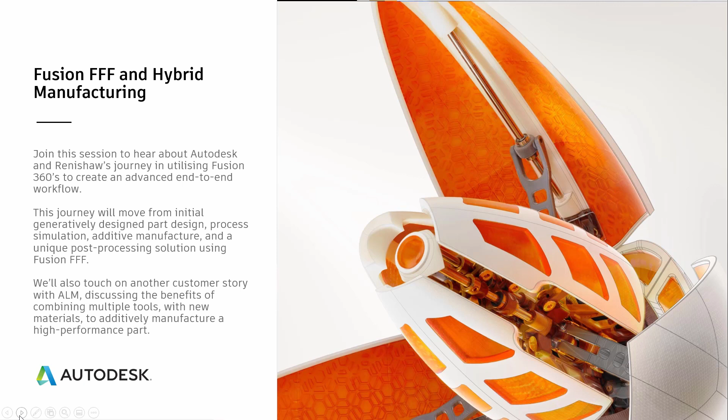We'll also touch on another customer story with ALM, discussing the benefits of combining multiple tools with new materials to additively manufacture a high-performance part.

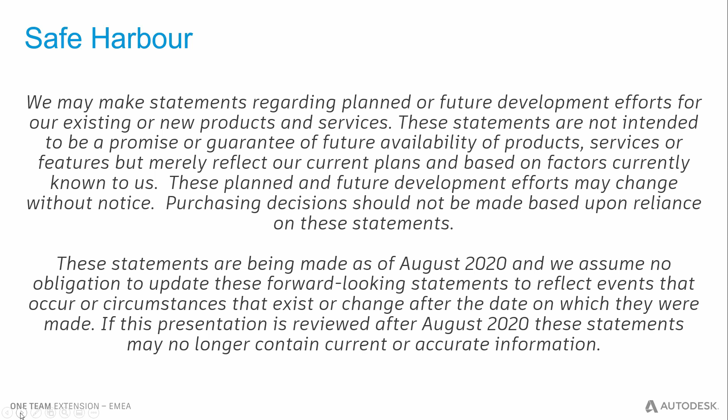But the ones we want to look at, these are quite small and they're measured in terms of inches in diameter, and these are used in pilot and research plants to focus on the next generation of reaction and fermentation technology. And by focusing on these small parts first, companies can get the edge before moving to large scale. Now, of course, small scale parts provide very different challenges to large scale, especially manufacture. So this was the opportunity for NOV and Autodesk and Renishaw to work together to develop this part.

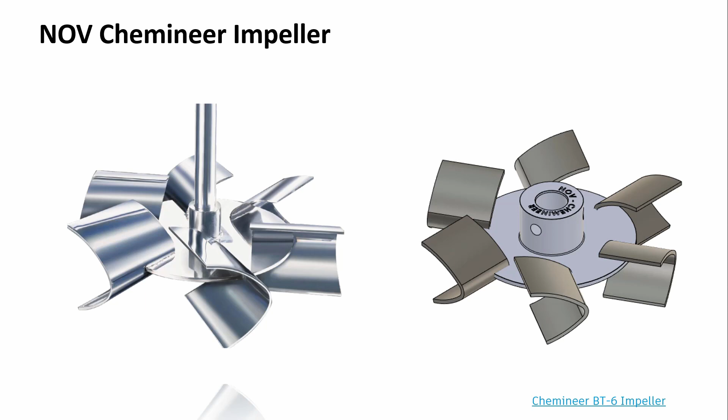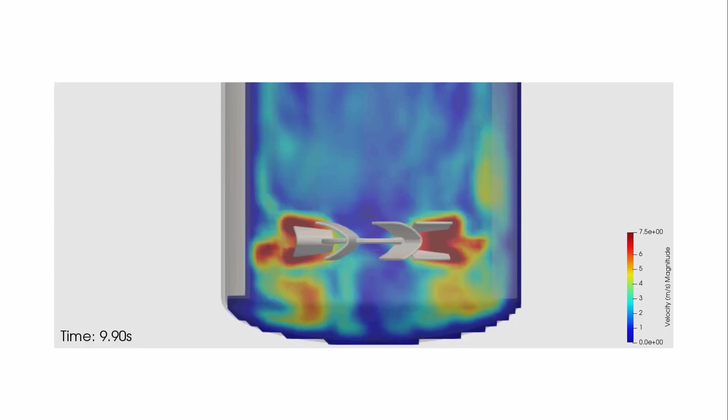So we began looking at the original CFD to see how the part performs. So we were looking at this and thinking, okay, how can we improve the part? The blades, of course, these work already, they're proven, so we've not got much design freedom. Looking at the hub and shaft, again, we've got very little design freedom here, and this is difficult to make the difference. But we started looking at the disc, the central disc that held the blades to the hub. And we started asking questions like, is there a need for it to be this way? Is it important? Is it critical? Or can it be changed? So what we did is we removed it and simplified the design down to the blades and the hub.

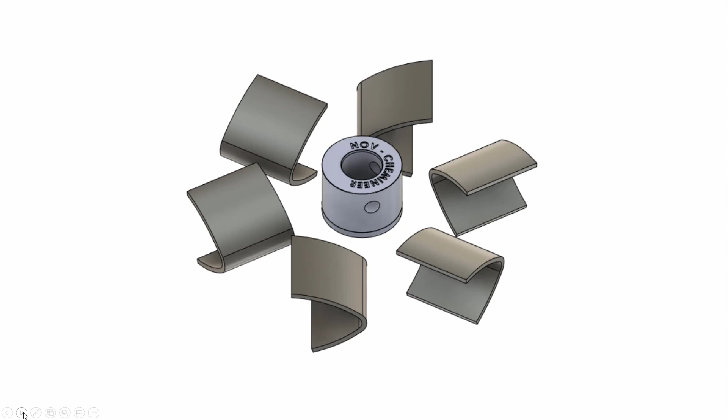And this is where Autodesk felt they can make the difference. This is where we felt we could increase the manufacturability of these small scale impellers to minimize costs. So we thought this was a case that maybe generative design would work well for. So generative design is an iterative design process that gives you numerous outputs for a given set number of constraints. The great thing about it, it gives you hundreds of solutions that maybe a team of people could not have conceived. And this is all within Fusion. So we created a setup, we ran studies, and what we did was we decided to look at 1/6 and focus on the connection of an individual blade to the hub.

We created preserve and obstacle geometry, and we set up load cases. And of course, we looked at different materials that we could use. So with regards to the manufacture of this part, this is where we started considering additive. Additive, of course, is great for low volume and outside the normal kind of operations of manufacture. And this part fell into that category.

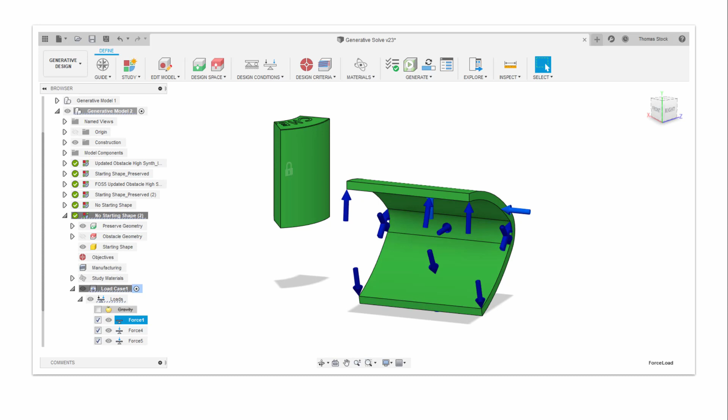And with the objectives, we really focus on minimizing mass and therefore cost, as well as increasing manufacturability, because this is what NOV wanted. And of course, this would mean if we were to do this, then we'd be successful in what we wanted.

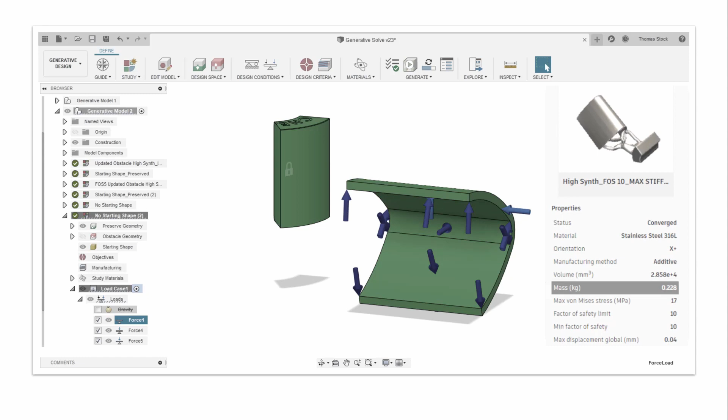And so here we go, we ran some generative studies, and you can see from the studies there was quite a few outcomes, and this is just kind of video showing you some of the ones that we look at. Obviously we wanted to find ones that lowered the mass, but of course we wanted to find ones that were still manufacturable, and this is where we went to Renishaw for their expertise.

So this is the first kind of design that we gravitated towards. We were looking at this and thinking, okay, manufacturability. How manufacturable is this for an additive process? And this is where we went to Renishaw. And then we started asking the bigger questions like, well, how would we orient it? How would we support it? What is non-negotiable? What happens after the build?

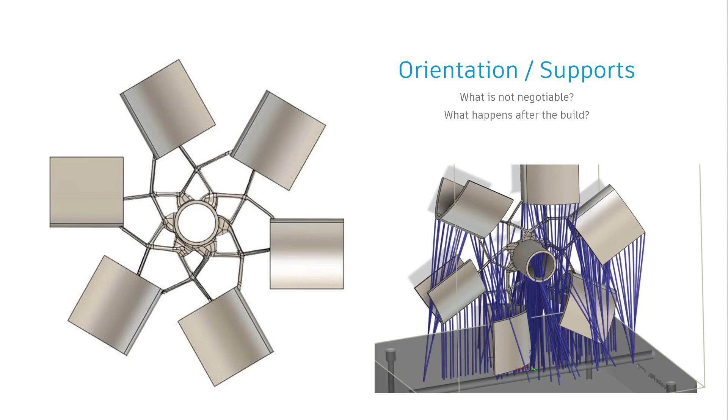So it's interesting, if you look at the bottom picture on the right, you could see that maybe this is not a suitable orientation. This is not a suitable part, so we need to find an optimal orientation, so we'd have confidence in the support structures. Because overall we wanted a successful build. And I mean successful in terms of getting a part at the end that has the desired quality that we'd want. So we went back to Renishaw and tried to draw on their vast experience with builds, orientations and support.

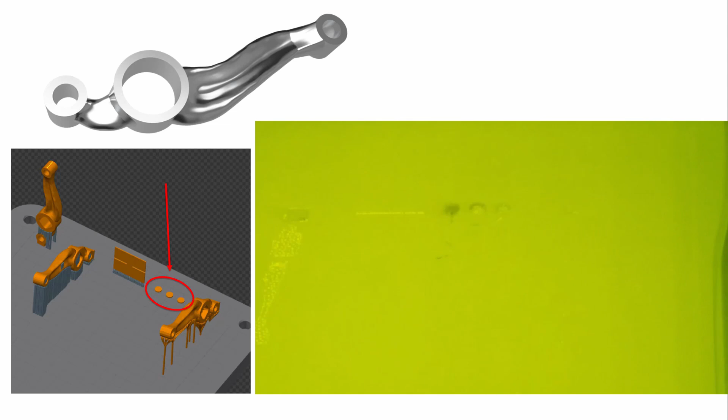And this part here, this is a bracket and some small discs. These are some issues that they faced in the past with builds like this. You can see that actually during the build the discs become loose and get pushed around by the recoater. Of course these ended up failing, and not only would it lead to a failed build but also possible damage to the recoater.

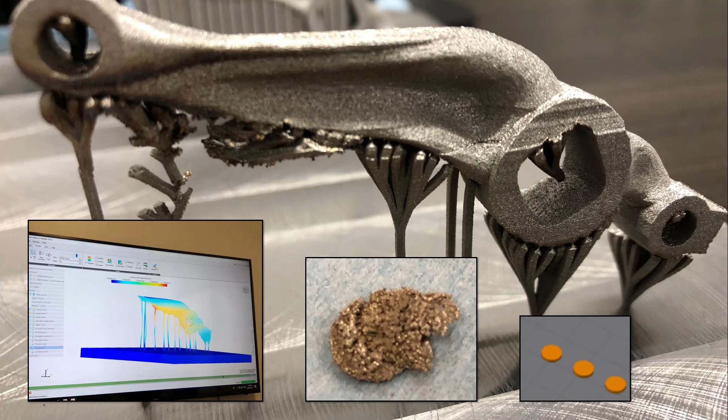And with the bracket itself, well, it actually didn't turn out much better. It failed as well. And if you actually look at it, you think, oh, maybe why did it fail? We had supports, we designed it for additive manufacture, but then maybe you look at the process simulation and you actually see these areas of support were always going to fail. You can actually see a picture of the disc at the end of the print. It's just a glob of material. So this leads us to then ask very important questions about our own part, about our own NOV impeller.

So jumping back to our part, the main restrictions we were finding for additive are function and material. And the three problems we were facing with the design of this impeller. The first one was performance. The part had to, of course, meet or surpass the performance requirement dictated by the simulation and the previous design, and meet the requirements placed by NOV.

Two, the availability of materials for additive, especially SLM, is quite limited and it's growing. So we need to find a material that's suitable for this part using this new additive manufacture process. This part didn't want to be too heavy. It's going to be spinning at a high RPM. And also, of course, it's got to be particularly corrosion resistant. It's going to be mixing with oils and various other fluids and be under constant use.

So one of the materials that we started to look at was titanium alloy, Ti6Al4V. So of course this is an expensive alloy, so it really leads us on to think about reducing the overall material usage. And this would lead us on to our third problem and consideration, so printability and support. So we want a successful build. The less support and the better orientation means less titanium used, and it's a faster build and it saves cost.

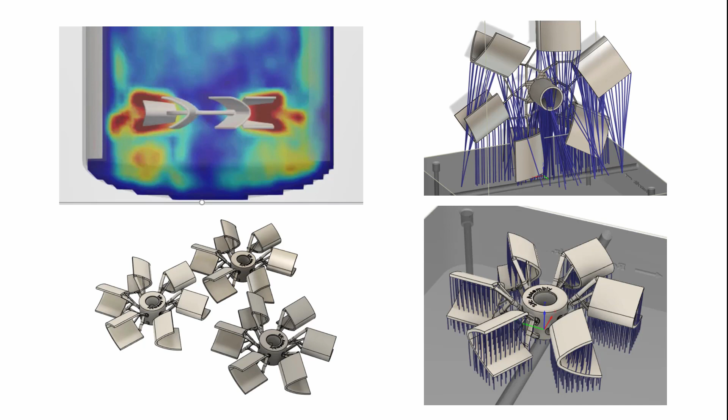And so we could reduce material usage and go back to what NOV wanted, which is improve the manufacturability, reduce costs. And I could talk how we went about this on the next few slides.

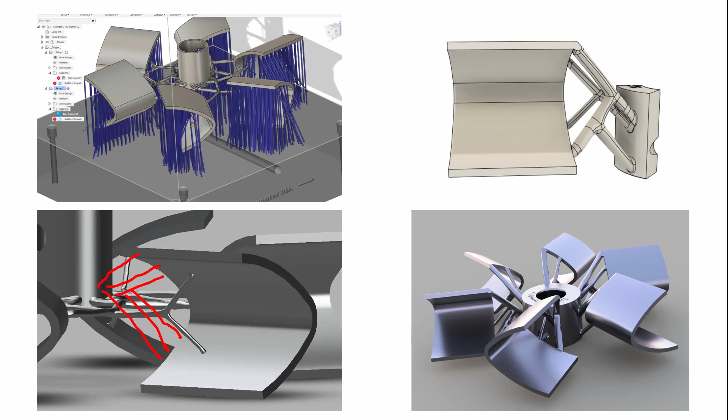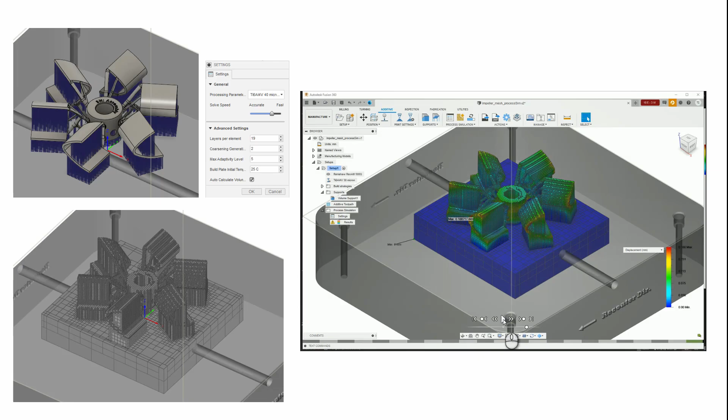So, having looked at the simulation and knowing the build would be okay moving forward, we then create the setup for the build. So we actually wanted to print 4 of these impellers, and we wanted to print it with Renishaw on their RenAM 500Q machine. This is a quad laser machine, and as you can see, this is in Fusion creating the setup, and got this simulation of the tool path, and we're looking at it on a per layer basis. And you zoom in and you can see the hatches and the borders.

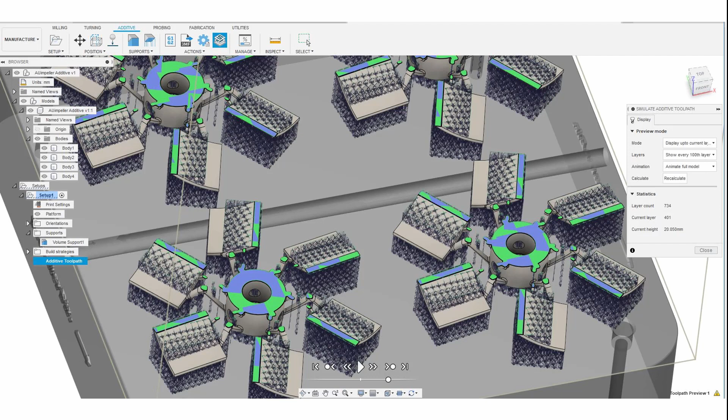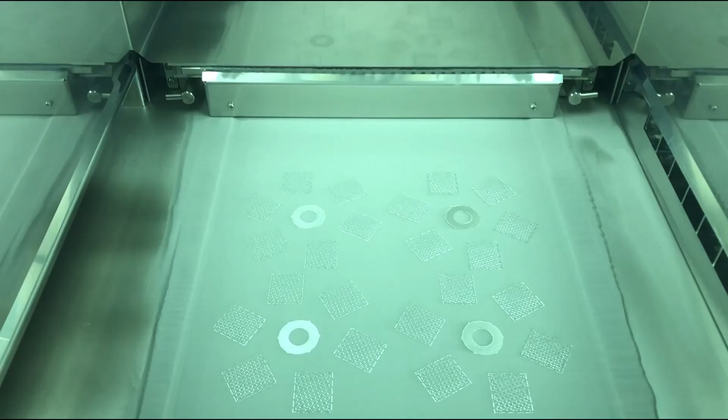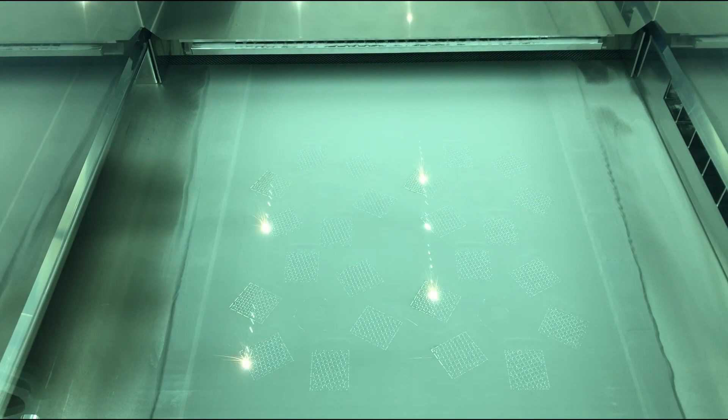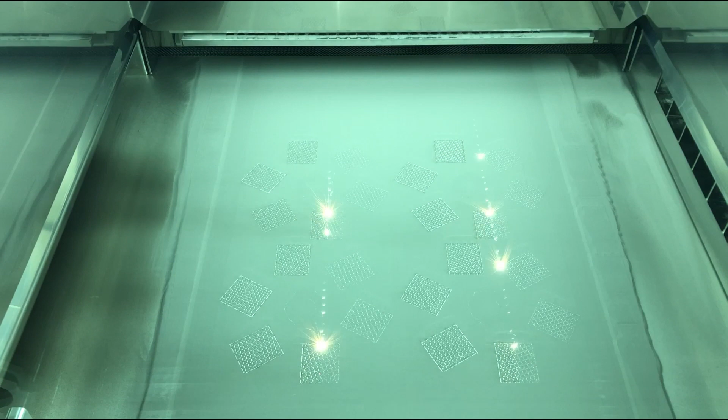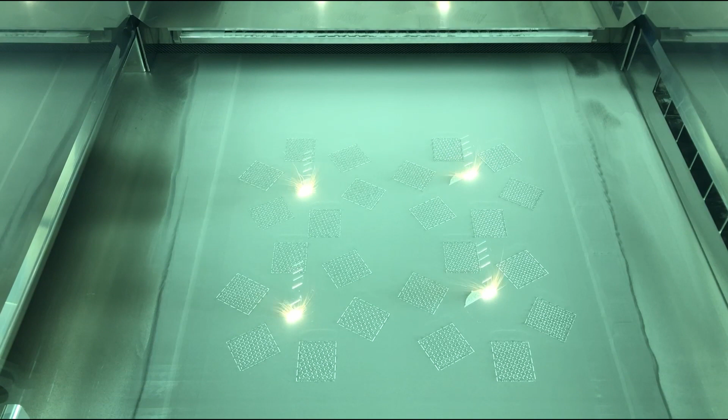See, there we go, the recoater's just laid the powder. And we've got the lasers, as I said, it's quad laser, so we've got 4 lasers. At the moment it's just creating the support structures. And then once it's done with the supports, it'll move on to the central hub, as you'll see. This is the first few layers that's been printing. And of course, if you watch carefully, see it's building the central hub profile.

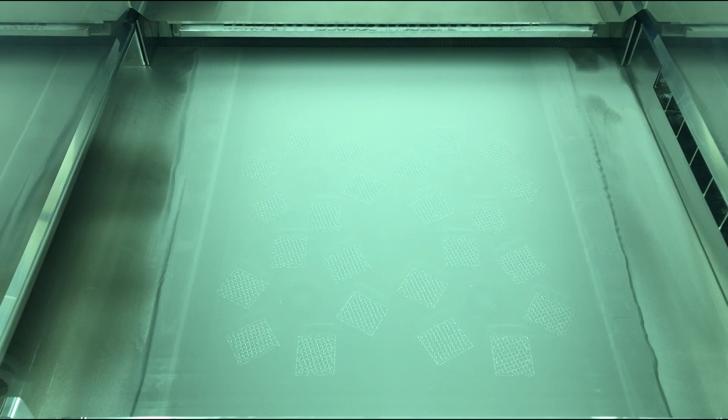So you can see actually that there is a loss of efficiency here. You can see where there's 2 lasers printing, while the other 2 have stopped. So if we look at the 7 wastes, we've got the waiting waste here. So we've got a bit of loss of efficiency. And of course, you could also say we've got the loss of efficiency of the powder spread, where there's a pause in the actual build process itself while the recoater has to lay the powder.

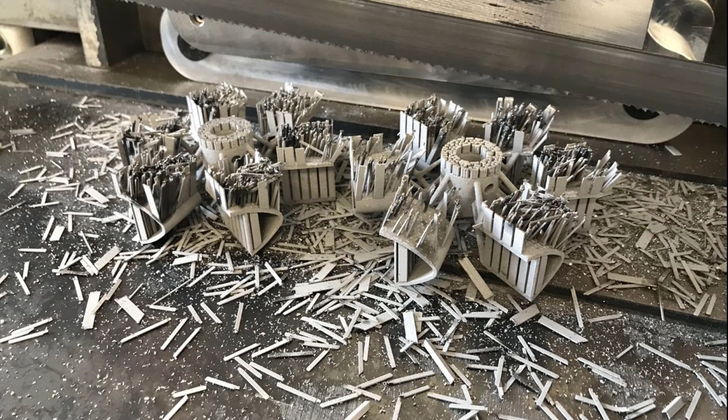There are machines now that automate this process, and it's good to see because it's catching up with the technology itself. But often people are ripping them off or they get machined off. So this was our next step. Having removed most of the support, we also wanted to machine some of it away. So this is now our post-processing stage.

And how we went about holding the impeller was using this machine block that we put in the jaws, and then we bolted the part through the top, as you can see in the left picture, through the central hub. Now, if you watch the video, you can actually see a relatively large deflection of the blade under low load. So you can see just how the dial moves.

So this is obviously quite worrying, and if you watch the video and listen to the sounds, you can just see the tool comes in contact with the blade. Listen to the sound, it doesn't sound good, and then right at the end, you might hear me swearing, so apologies for that, right at the end the tool broke.

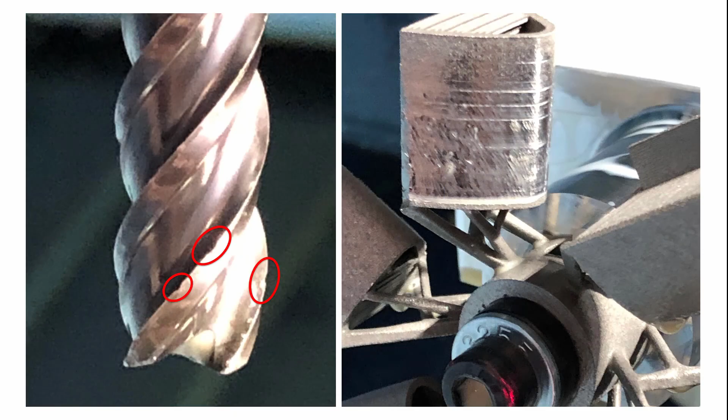So we can actually see with a zoomed in picture the tool's chipped, it's broken, and there's an awful chatter finish on the critical surface of the blades. So looking at this, it's not going to work, and we're running out of time.

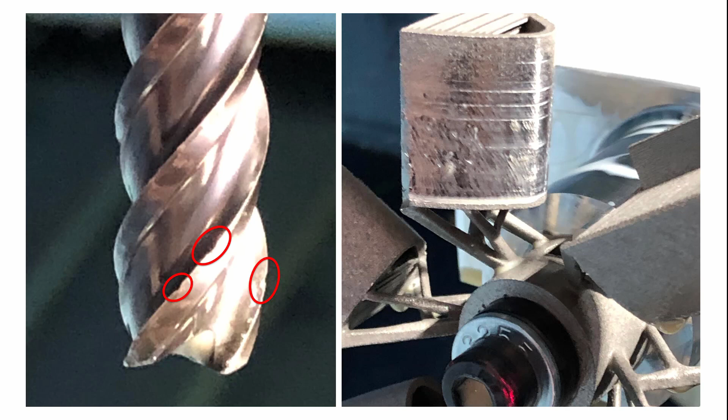I was at Renishaw's Additive Solution Centre in Kitchener. I was only there for a week, and we were trying to go through this whole process in the few days I was there. And we realised quickly that the current setup was not going to work for machining this part. So we had to go back to the drawing board. So we had to get creative as well.

And then when they were taken off and inspecting the part at the end, this is where they've seen that they were so far off. They're so far out of tolerance because the part was actually being bent by the jaws. It was held in a position in the conformal jaws, and as soon as it was taken out to be inspected, it went back to its normal deformed rested position. So everything was out, and we knew this wasn't a solution for us going forward.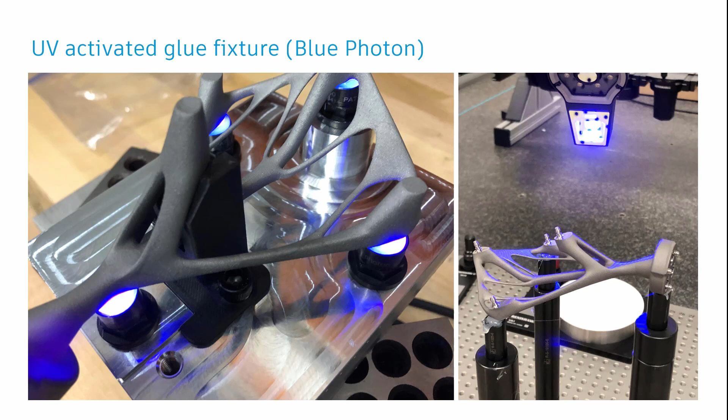Again, drawing on Renishaw's past experience, they brought up this new innovative solution to holding difficult parts. This is the UV activated glue fixture, also known as the blue photon fixture. It's very interesting how it works. It uses this UV curable glue on these inserts, and you literally glue the part down. Awesome. So incorporating this blue photon glue fixture, this was the solution that we came up with.

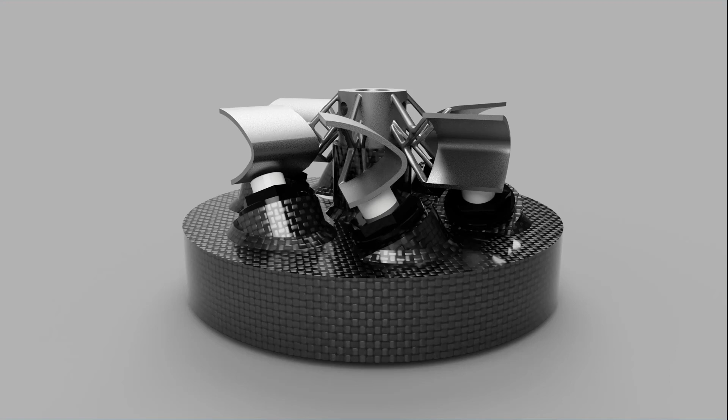You can see each one of these blades are being held. This is a 3D printed fixture. We'd had issues with machining, we needed a fixture to hold the blades properly, and we needed something quick. It was printed overnight out of carbon fibre, and it holds these inserts with the glue on that hold the individual blades. So we had something in the morning to hold our part for machining. I'll give you a breakdown of how it works on the next few slides.

So you can see we've got our impeller and our gripper, and that's offset from our blades by about 1 millimeter. The blades are the critical surface for machining, so this is what we need to hold, because these surfaces drive the mixing of the fluid. So we had our fixture offset by 1 millimeter. We've then got our insert, and it holds the gripper in place and makes sure everything's aligned.

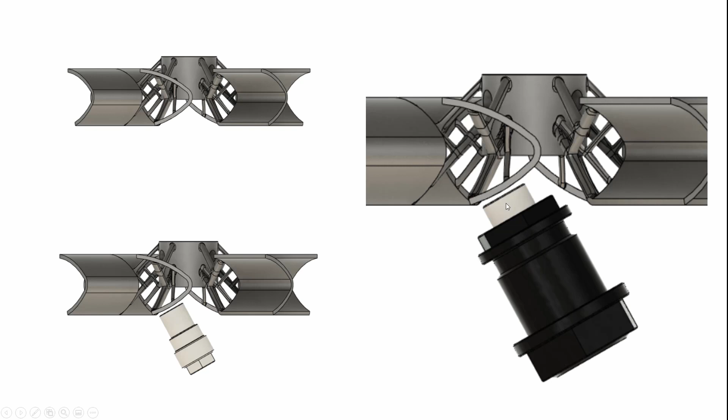But now we need a fixture to hold these in place to the blades. And this is where our 3D printed fixture came in, and this is how it held them. You can see a sectional analysis all within Fusion.

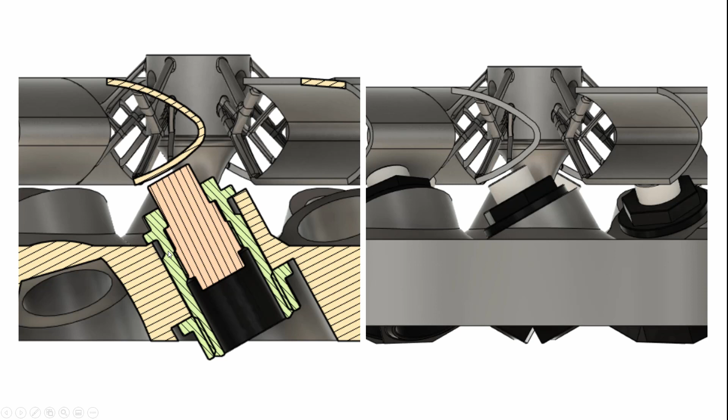You can see how the gripper's offset by 1 mil, as I said, and you've got these very slight flanges either side of the insert, and it's not a large contact surface to play with, but it was enough to hold the part really securely.

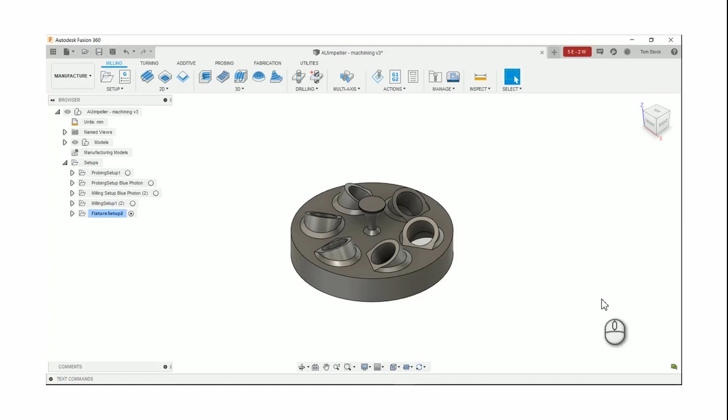And here we go. So this was the part actually having been designed, and this is how we set it up for manufacture within Fusion. So obviously, as I said, we'd had an issue with the original fixture, so we went back into Fusion to create this new part to hold these blue photon UV curing inserts to hold our blades for machining.

And I can play the video, and this is us having designed the part, creating the setup, and printing it directly from Fusion to a printer. The printer that we used was actually the Ultimaker S5, but I'll show you that in the next slide or so.

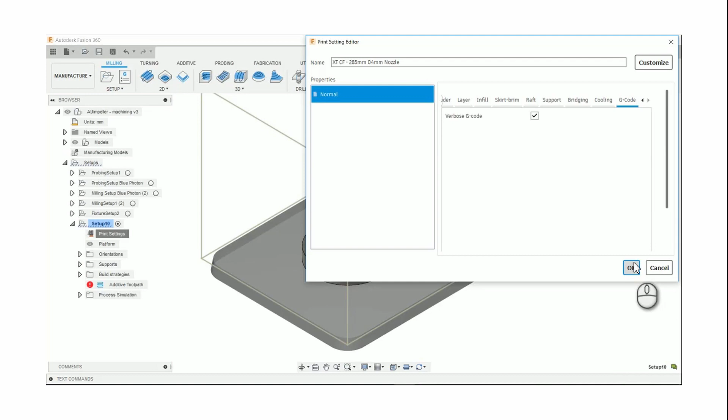And what was great about this is we could just stay under the one Fusion roof. There's no back and forth, no data exchange. We stay within Fusion. We had the impeller already there. We just loaded in the CAD data of the inserts, designed around them, designed around the impeller, and then we could just simply click print and generate this part and send it to the printer, and then we had a fixture to use overnight. You can see it just post-processing, very quick.

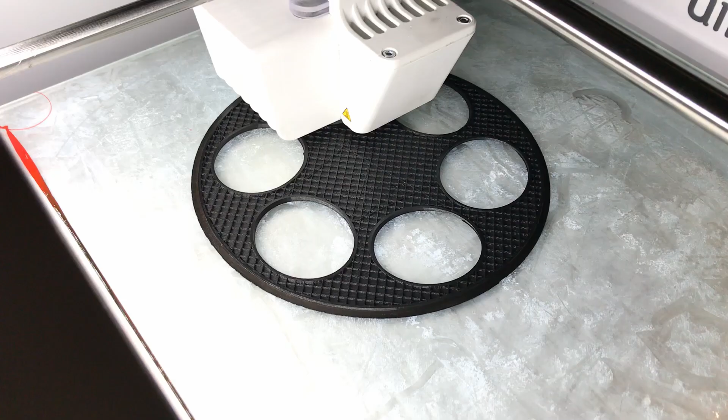So here we go. This is the fixture having been sent to the FFF printer. This is the Ultimaker S5 that we used, and the material that we used to print with is this ColorFabb Carbon Fiber XT filament. It's quite different to normal 3D printing filament in that it's 20% carbon fiber, so it's a lot stronger and stiffer, and this is of course key for machining.

Is it as high performance as maybe a metal fixture? No, but it meets the requirements for our low machining forces. See, it's just the print head doing the infill now, building up in layers. And hopefully all it needs to do is just hold the blades firmly and stiffly so there's no chatter. And of course a better hold would lead to a better surface finish and a better overall quality. And interestingly, this material had 84% of the tensile strength of aluminium, so it's very stiff.

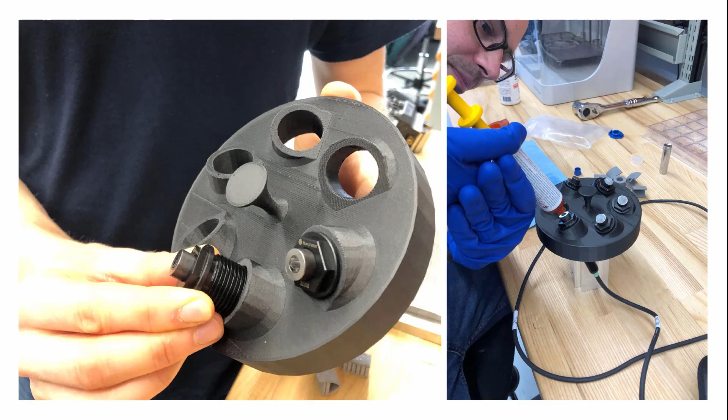Fantastic. So for those who are interested, this is the printed fixture, and you can see me just fitting in the inserts, and they fit really, really well. And then we've got the central pillar as well, so that's just to place the central hub of the impeller on and gives us a reference for aligning the part with the grippers.

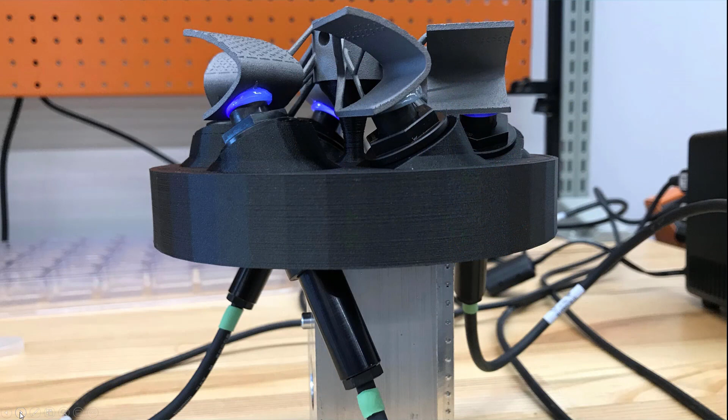And on the right, that's Carl from Renishaw just applying the glue, the photosensitive glue, ready for curing. You can see this is the glue applied, and we've got our UV light source, and all it needs is 90 seconds of curing to get a full set, and we do 3 at a time.

Perfect, and there we go. That's the impeller fully held by our fixture and the blue photon inserts. And now once the glue's set, the light sources were removed, and now we can just put in a chuck and we're ready for probing and machining.

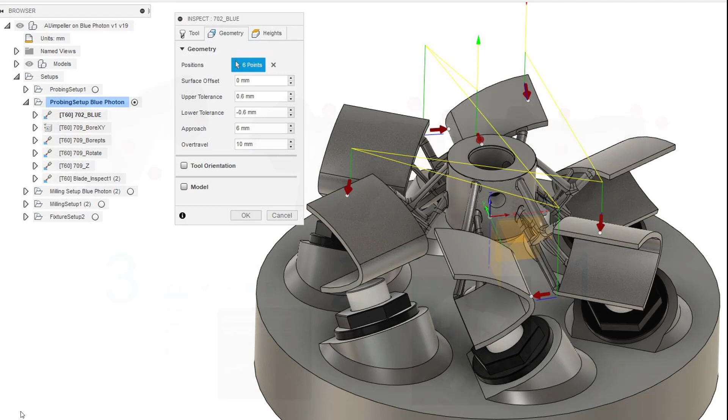So we jump back into Fusion and we create our probing setup. We set up our points, and you can see a nice simulation of the probing path within Fusion. So this is the 3-2-1, and of course this is also known as plane line point alignment. And you can see how it's been set up here. So this is what we use to do the initial alignment of the part.

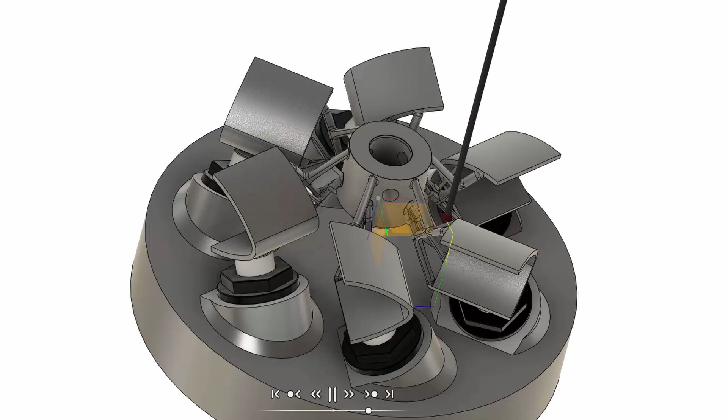This is it in action, and it does the plane line point. So it's just the plane, and now it's going to do the line, and then that final point.

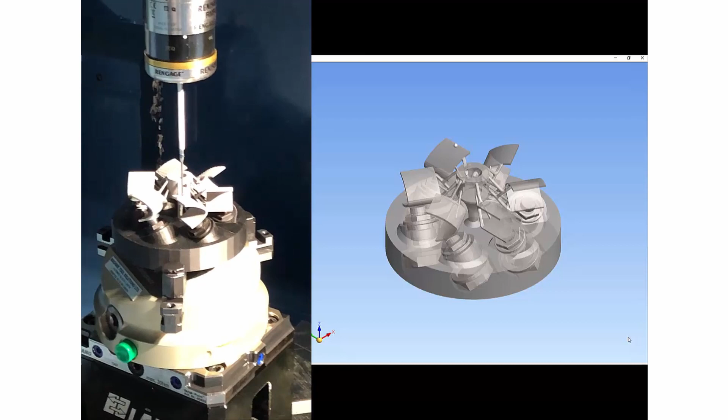And of course, this is where a bit of the magic happens. So we've got this product called MSP NC Perfect Part, and this is a post-processor that we use within Fusion that basically does the magic of aligning the part. NC Perfect Part wasn't available commercially at the time, but it's just used by us for this project.

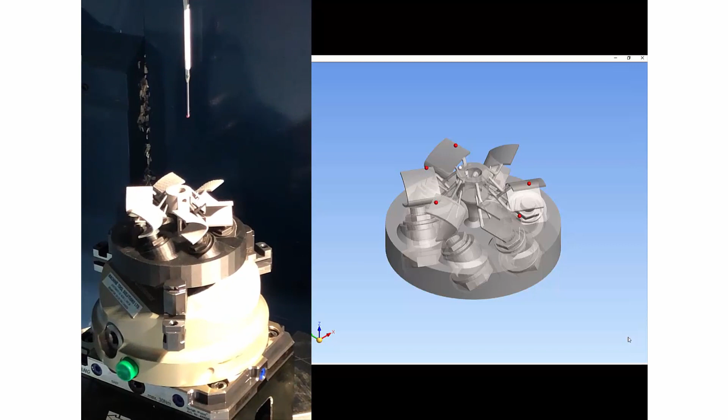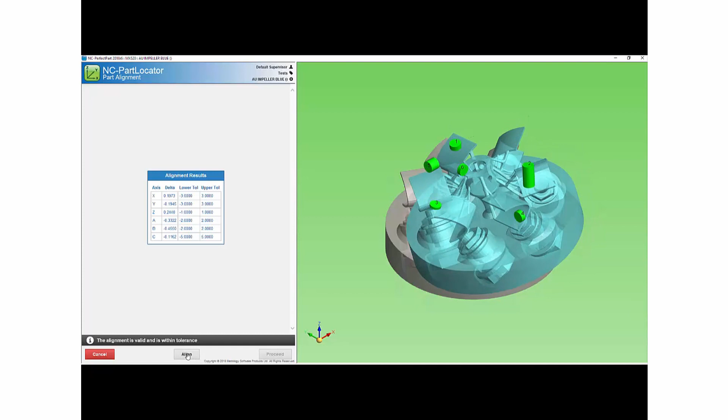And you can see it doing the 3-2-1, the plane line point alignment, and you can see the points being plotted on the part on the right. And if you go into MSP, you can see the full report with the deviation of the points, and you can see how it needs to do the alignment to fit the part. You can just see that again, that unalign and alignment. Fantastic, and then we can proceed when we're happy.

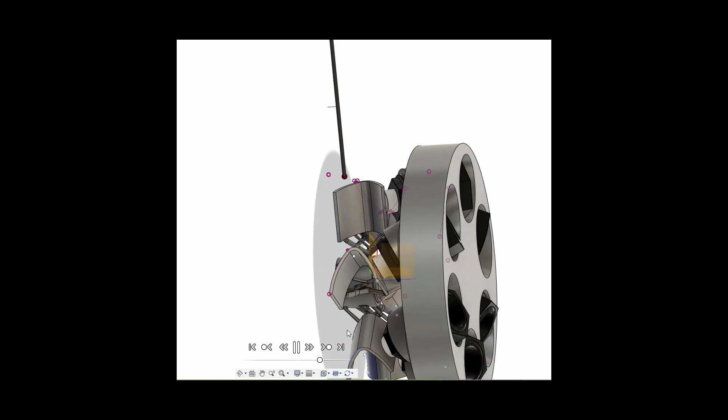Now of course we can't align everything with a 3-2-1, so further alignment is needed. So that's where we go into the final alignment with the blade. So again you can see it running through the probing, the simulation of the blade. You can see on the left then the real life probing of the blade. Points being recognised in MSP NC Perfect Part.

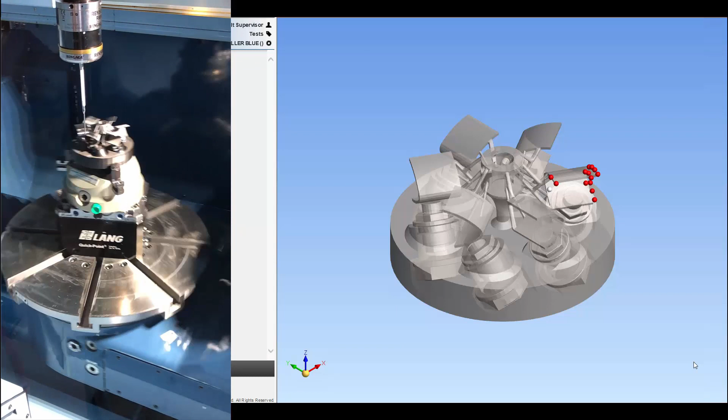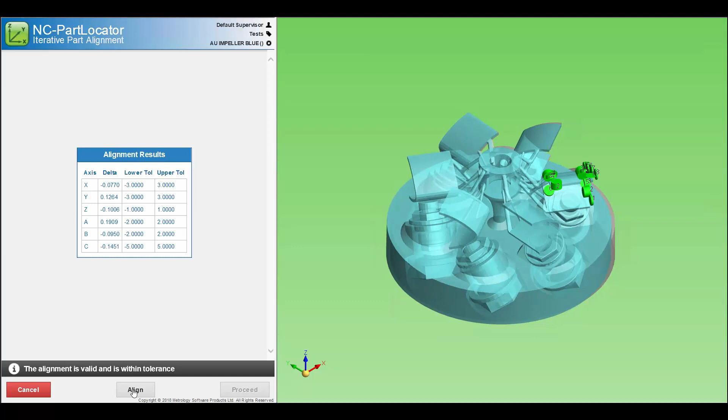So we can see our alignment results. Again, we've got this full report. We can see kind of the deviation per each point. And clicking proceed does the final full alignment of the part. And then you can see the results. And again, one final report just showing you with the new alignment, with the new coordinate values.

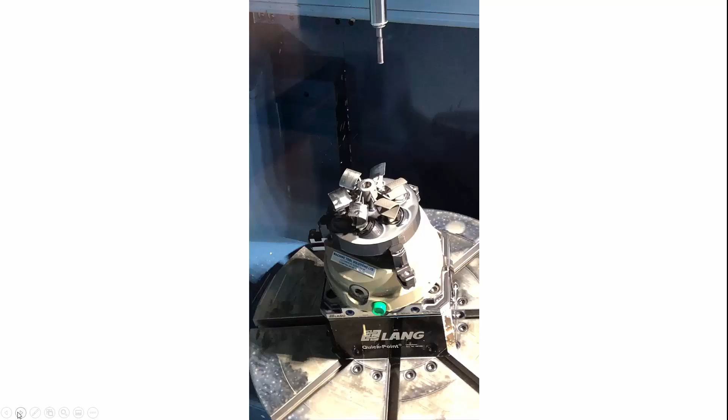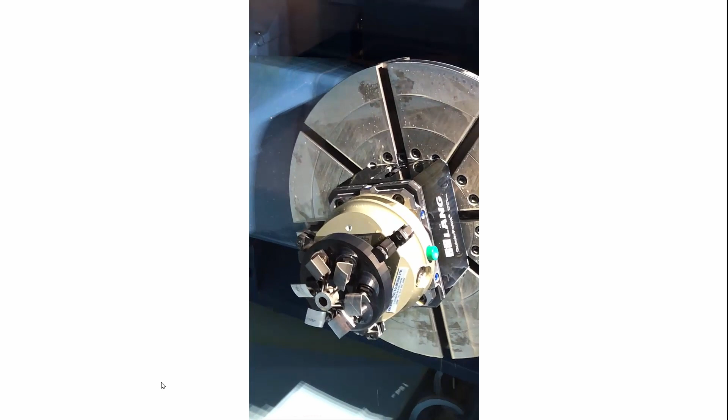Fantastic. Now we're ready to proceed with the machining. So this is where we cross our fingers a little bit and hope it goes better than the last time. Yeah, this is where we did have confidence in our work in the fixture. Go spindle and the coolant. And now hopefully we get a much better machining sound. Yeah, sounds much healthier.

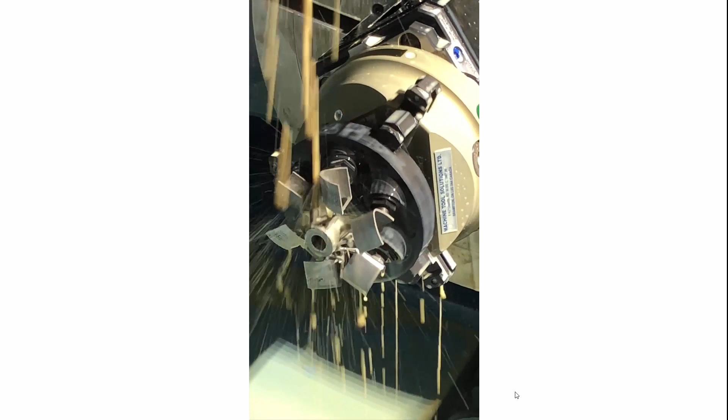Fantastic, and of course the programming of the toolpaths was all done within Fusion. Great, and we can see that much better surface finish that the tool has given to our surface of our blades, and there's a happy customer at the end as well.

So to summarise our journey. So the original model, we remodeled it in Autodesk's generative design. We did the SLM process simulation. We did the build preparation as well. We also went back and had to do the fixture design and then printed it on an FFF machine. And then there's the part alignment with NC Perfect Part that I've just talked about. And then of course the final post-processing stage via subtractive manufacture.

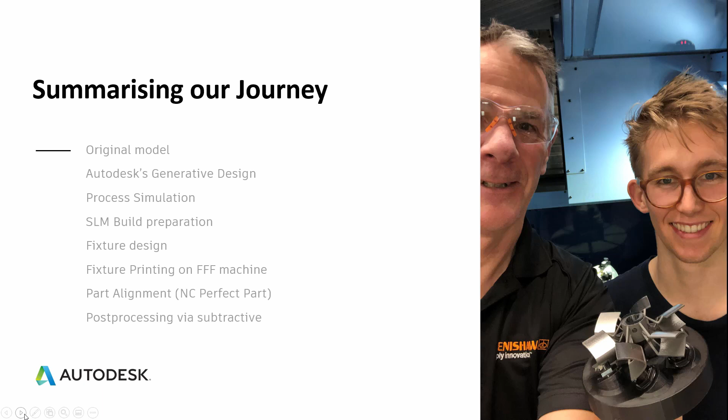So apart from the remodeling with Autodesk Generative Design, the rest was actually done in 3 days. So I flew out on the Monday and was with Mark Kirby from Renishaw on the Tuesday, and then flew out on the Friday, so just 3 days. So we could operate within this time frame because we could stay within Fusion 360, stay within the software for the whole workflow from end to end.

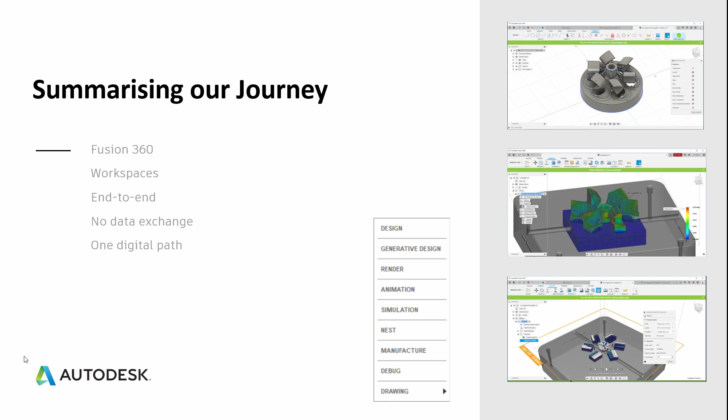And the great thing is you've got this one continuous digital path. So if you wanted to say, come back in 6 years again, all you have to do is just regenerate everything that's here and everything will update. And same again, if you want to go back and change something at the very beginning, again, everything would update. And that's just the great thing, that's the power of Fusion. So that summarises the Renishaw and NAV project.

Now I want to talk briefly about the ALM partnership. ALM stands for Advanced Laser Materials, and it's a company that operates within the EOS group. So the project that we collaborated with them on was a project to redesign a high-performance mountain bike pedal using various tools, including Autodesk Generative Design. And we did this redesigning with the focus being on the material, using ALM materials. And of course, a lot depends on the material in terms of the design and manufacture, so this is something that we really focused in on.

And the real focus of this project, therefore, was about bringing and testing these new materials into Fusion. During the course of this project, 4 new ALM composite materials are being brought into Fusion. So doing this and working with companies and creating partnerships like the ones we have with ALM allows us to bring in new materials so that these kind of companies can then use our software and use their own materials. And it's kind of this bringing of all this know-how and knowledge together that creates something quite special.